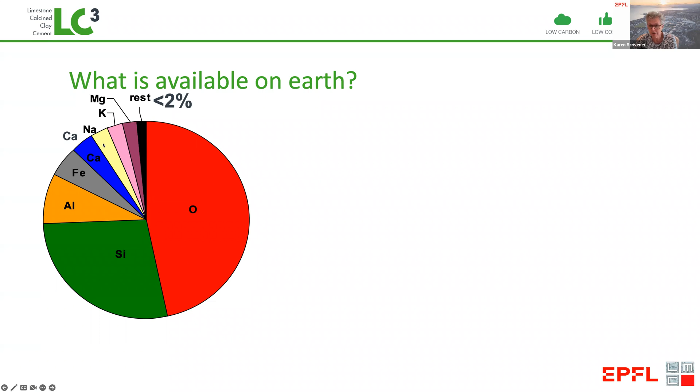So Portland cements are an inevitable consequence of the chemistry and geology of the earth. We see here that just 8 elements make up more than 98% of the composition of the earth: oxygen, silicon, aluminium, iron, calcium, sodium, potassium, magnesium. Now, the alkalis are basically too soluble. On the other hand, iron and magnesium oxide have too low solubility.

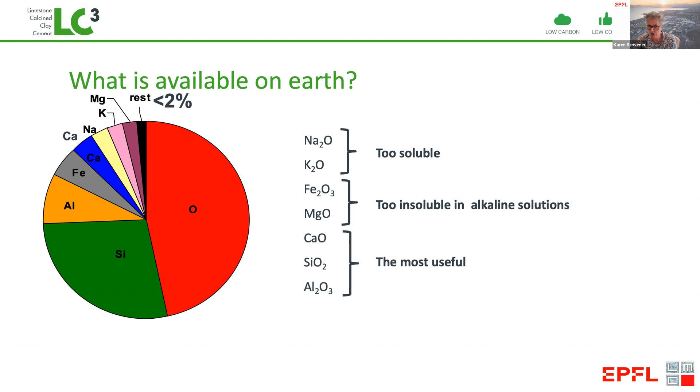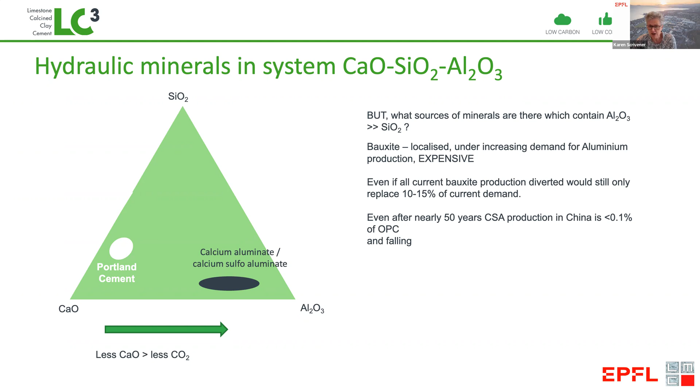This means going from the whole composition of the earth, we come to a system of just 3 oxides: calcium, silica, and alumina, which we've studied for over 100 years. And we know in this system, there are basically only 2 regions where we can produce cementitious materials: the region of calcium silicate, which is what we call Portland cement, and the region where we have calcium aluminate, calcium sulfoaluminate. At first sight, this looks interesting because it contains less calcium, so less CO2, but the problem is we don't have the minerals we need, which contain much more alumina compared to silica. We'd have to use things like bauxite, which is heavily in demand to produce aluminium.

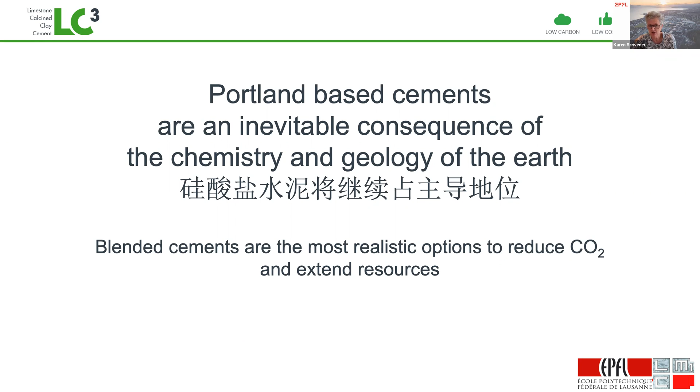So Portland cements are here to stay, and the best way to reduce CO2 is to replace as much as possible of the Portland cement with other materials. Now, this is not new. We've been using substitute materials, particularly slag and fly ash, for many, many years. The problem is that the amounts of slag and fly ash available today are really quite limited, and these will decrease drastically in the future.

Because the first thing we've got to do to confront climate change is to avoid burning coal. And producing iron from iron ore is also a very carbon-intensive process. So we don't have a lot of other materials available. Things like vegetable ashes are only available in very small amounts. We have a lot of limestone, but we can't use that in additions more than 10 to 15%.

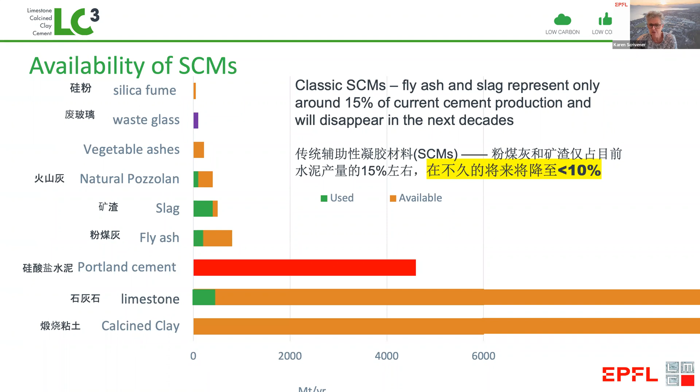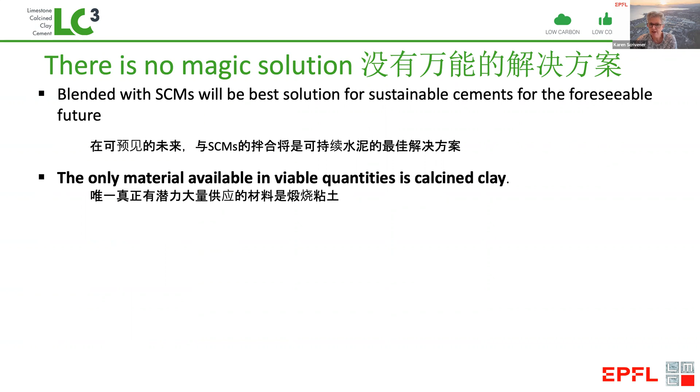What can be a real game changer here is our clays, which when they're calcined, that's to say heated to about 800 degrees, produce very reactive materials. So this is behind our invention of LC3, to realize that SCMs are the best solution for the sustainable future, that the only material we have in viable quantities is calcined clay. And this is the really new novelty, that we realize there's this synergetic reaction between calcined clay and limestone that allows very high levels of substitution.

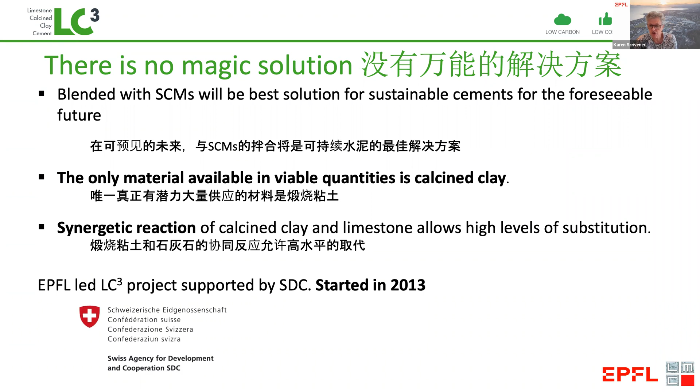So this was a project we christened LC3, and it has been a project supported by the Swiss government since 2013. Now, the reason we get this much lower CO2 is because we reduce the clinker, which has very high emissions—we have a small amount of clinker we still have—but the calcined clay has much, much lower emissions, maybe only 1/10 of the emissions of clinker. And the other ingredients, the limestone and the gypsum, basically have near zero CO2 emissions.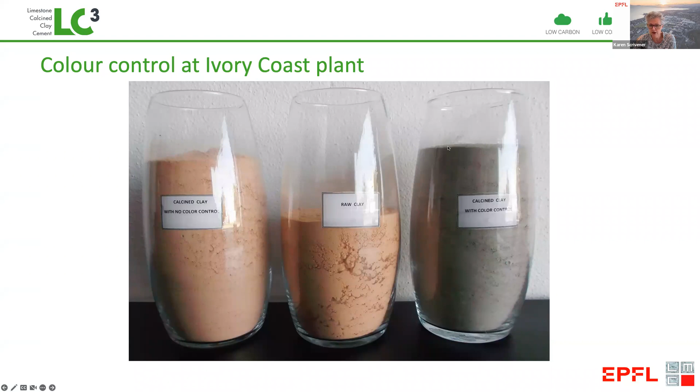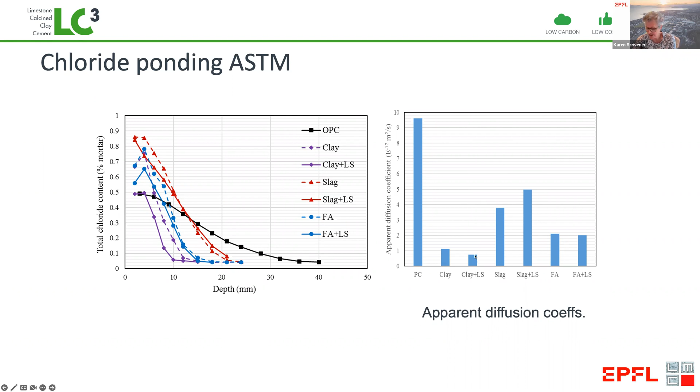Just to touch on some of the key advantages, particularly chloride resistance, which is the number one issue of durability of concrete. Here you can see the chloride penetration in the reference Portland cement. It's somewhat better with slag, and better again with fly ash. But best of all is the calcined clay limestone combination, which has an apparent diffusion coefficient ten times less than the reference.

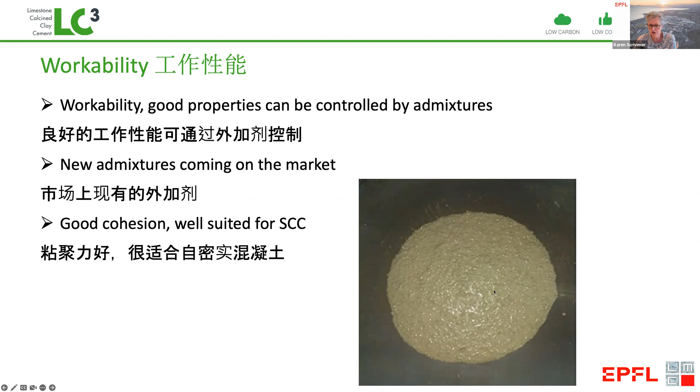There are questions about workability, but good properties can be attained, controlled by admixtures. New admixtures are now on the market, and the product has very good cohesion, making it very suitable for self-compacting concrete.

But if we remove that limitation, we can go to a clinker substitution level of at least 40%. And on a time scale of 2050, we could probably go higher than this.

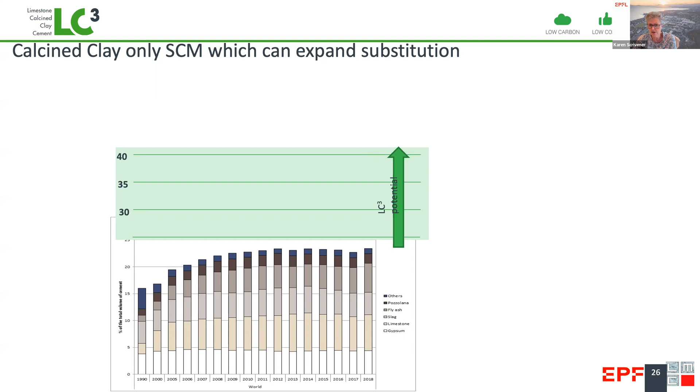40% substitution on average worldwide would represent a saving of 400 million tons of CO2 per year. And if we could go to 55%, this would represent 800 million tons of CO2. That's really enormous - that's like 2% of all CO2 emissions today with just one technology.

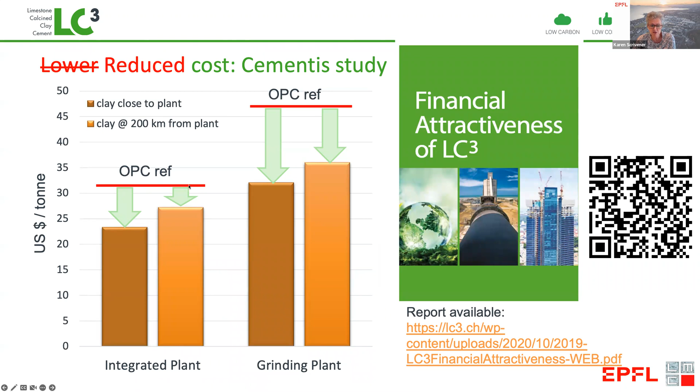Even better news, you can save money. You can really reduce the costs of LC3 compared to your OPC reference, in both an integrated plant and especially in a grinding plant.

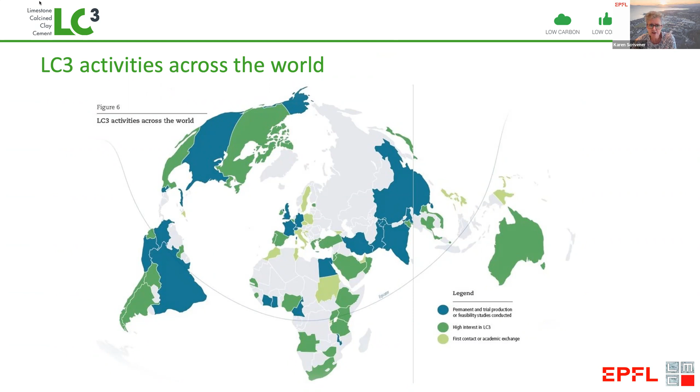So we're very pleased to see that this has really been taken up around the world. We're now in contact with producers in more than 40 countries. This slide shows some of the plants either already online or coming online in the next one to two years. So you can really see this technology has taken off. It could be done in China, and I hope some people will really look at this in more detail soon.

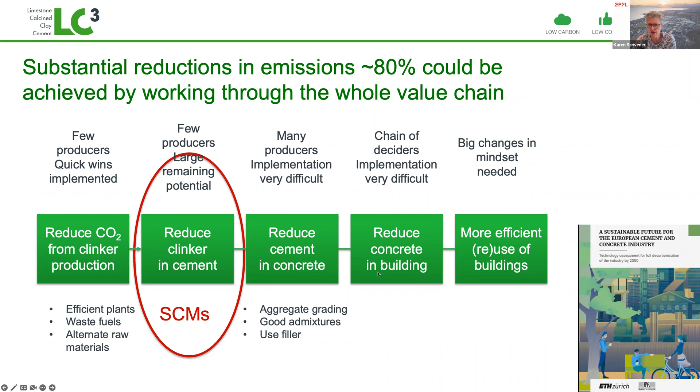Before finishing, I just want to say that this is only one part of the chain. If we worked at all levels - more efficient clinker production, less clinker in cement, less cement in concrete, less concrete in buildings - we could potentially save about 80% of the emissions.

Just looking at the cement in concrete, we see today there's tremendous dispersion, tremendous wastage. One way this can be reduced is by going from site mixing to ready mix mixing.

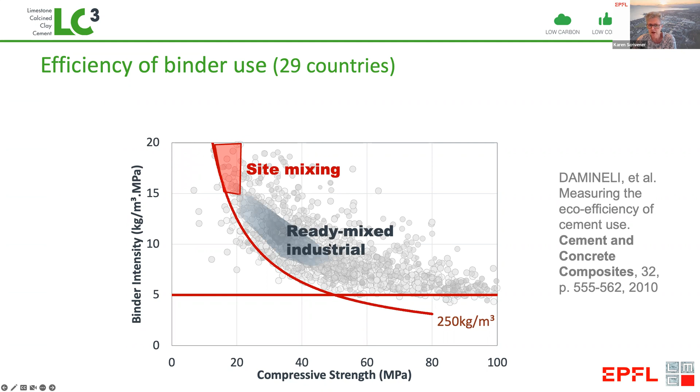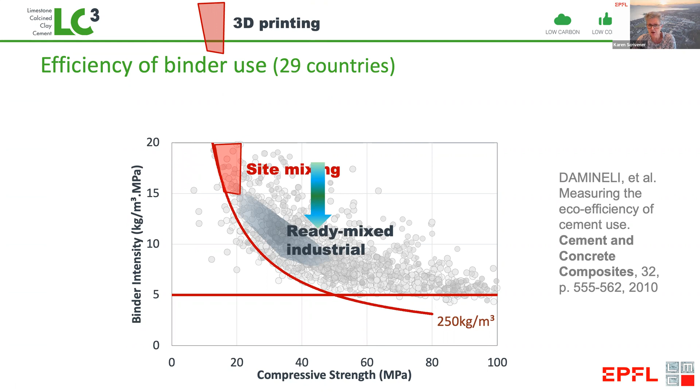However, what we do not want to do is start concentrating on 3D printing, because this is a very inefficient way of making concrete - exactly the reverse of what we need to confront climate change.

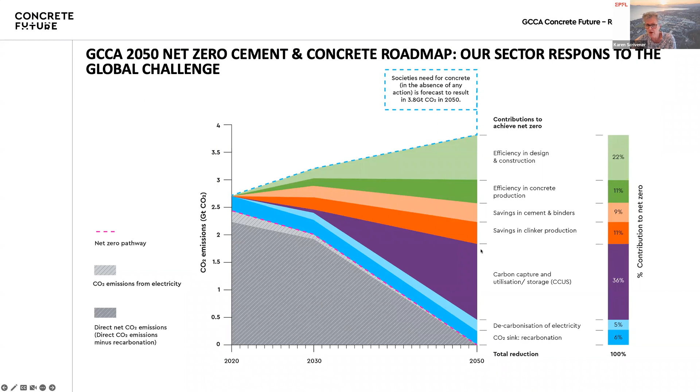So to conclude, I hope I've managed to give you a small insight on how we can reduce CO2 emissions. We can work at the cement level by increasing SCM substitution, at the concrete level by minimizing cement content, and we can also work at the structural level. All of these will generally lower cost, so very good news.

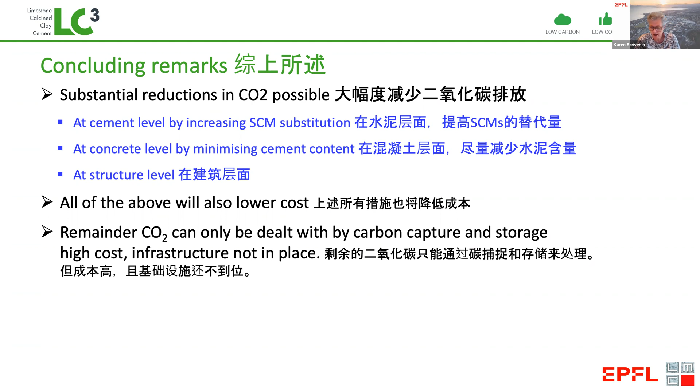We will never be able to produce pure, completely zero carbon concrete by these means. We'll always have a small residue that has to be dealt with by carbon capture and storage, but this has high costs and the infrastructure is not in place. So it's very important to look at all these other levers before we resort to carbon capture and storage.

In terms of SCMs, calcined clays are really the only option to take this technology much further. And the good news is this can be done fast and at scale.